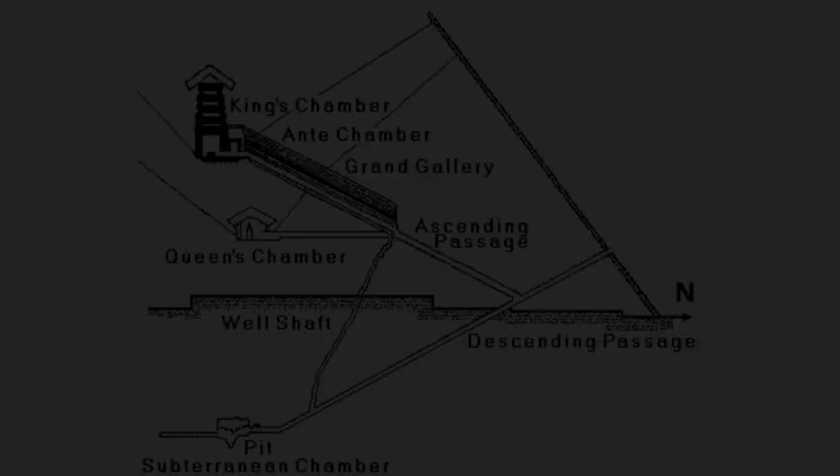Let's look at the horizontal passage and the Queen's chamber in more detail. Here is a diagram of the interior passages and chambers of the Great Pyramid. We will be focusing on the Queen's chamber and the horizontal passage.

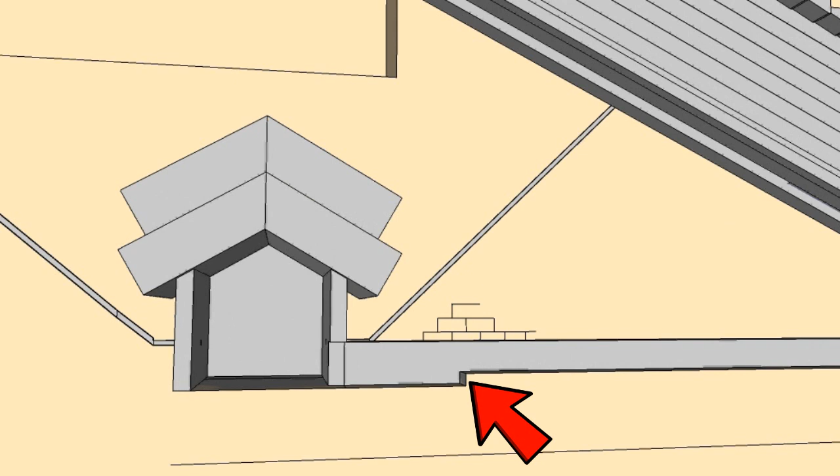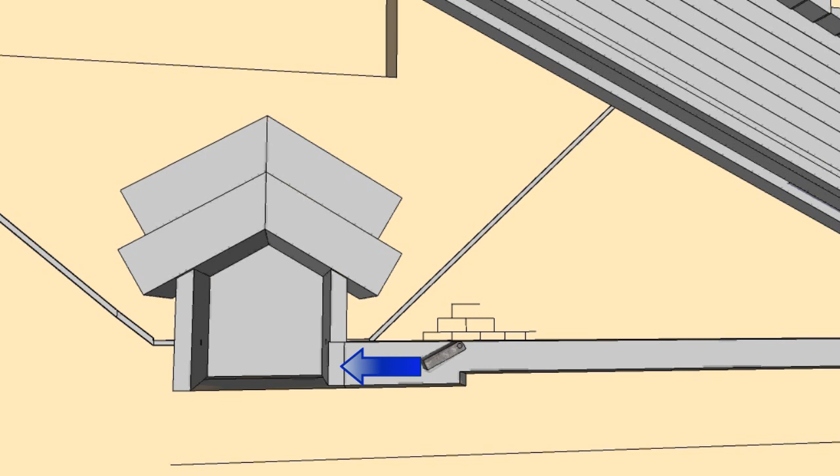There is a step in the horizontal passage. This is the location of the check valve. This valve allowed water to enter the Queen's chamber from the Grand Gallery when the water piston moved down. This check valve stopped water from moving from the Queen's chamber back into the horizontal passage.

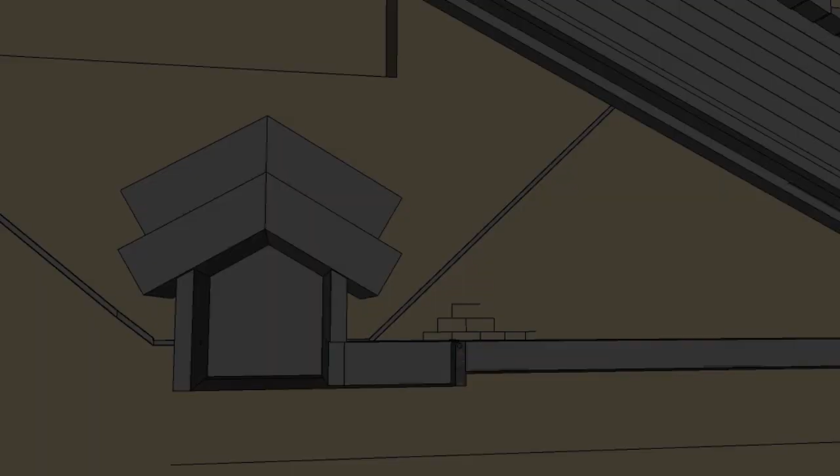Now that we have seen how the check valve in the horizontal passage functioned, we will see what happens with the introduction of water. The pressure gauge indicates the relative pressure in the Queen's chamber. Water entering the Queen's chamber compresses the air in this chamber to a high pressure. The check valve closes, preventing water from moving back into the horizontal passage.

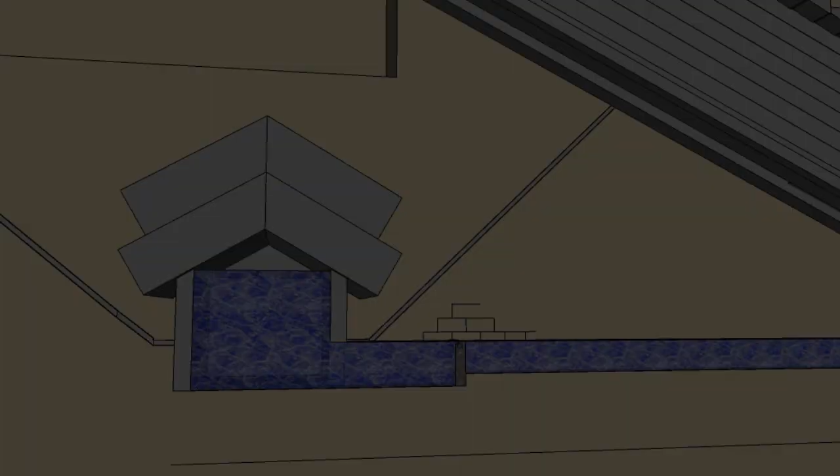The massive water piston traveling down the Grand Gallery cylinder is the power stroke of the upper pump built into the pyramid structure. When the water piston moves down, water is forced through the horizontal passage, past the check valve, and into the Queen's chamber.

Before the power stroke, the Queen's chamber is about half full of water, and the upper portion is filled with air. The power stroke forces additional water into the chamber, which compresses the air to a high pressure. As soon as the pressure of the air is compressed to the maximum the water piston can achieve, water movement stops and the check valve in the horizontal passage closes.

This check valve stays closed as the Grand Gallery sequences through its 4 phases until the next power stroke occurs. After the power stroke, the Queen's chamber is about 3/4 full of water, and the air in this chamber is highly compressed. The check valve in the horizontal passage is closed.

What happens next in the Queen's chamber? Where does the water go? The water can't possibly go into the Queen's chamber vents. The vents were sealed at the bottom ends, and no water, air, or anything could travel through them. The upper ends of the Queen's chamber vents are blocked off as well, so the water could not and did not travel through these vents during the water pumping process.

The Queen's chamber is mostly full of water, and the air is compressed to a high pressure. Where does the water go? Water cannot go into the Queen's chamber vents because they are blocked off.

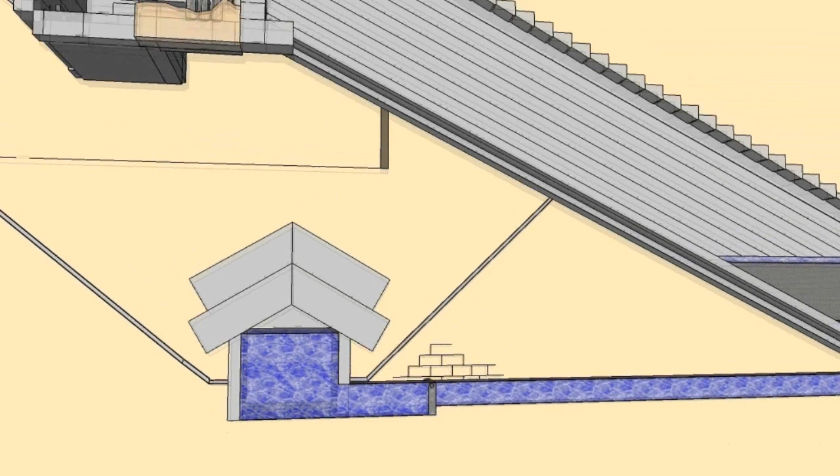The compressed air moves water into the vent in the floor, and water is moved up the vent, past the check valve in the floor of the King's chamber, and into the King's chamber. This is accomplished using the vent between the floor of the Queen's chamber, which leads up to the floor of the King's chamber.

The compressed air in the Queen's chamber pushes water through the vent in the floor of the Queen's chamber and up into the King's chamber, past the check valve in the floor of the King's chamber. This additional water added into the King's chamber compresses the air in this chamber.

The compressed air in the King's chamber pushes water through both of the King's chamber vents and up and out of the Great Pyramid structure. It is fascinating to watch the water pumping process as water moves through the Great Pyramid structure. The original builders were geniuses.

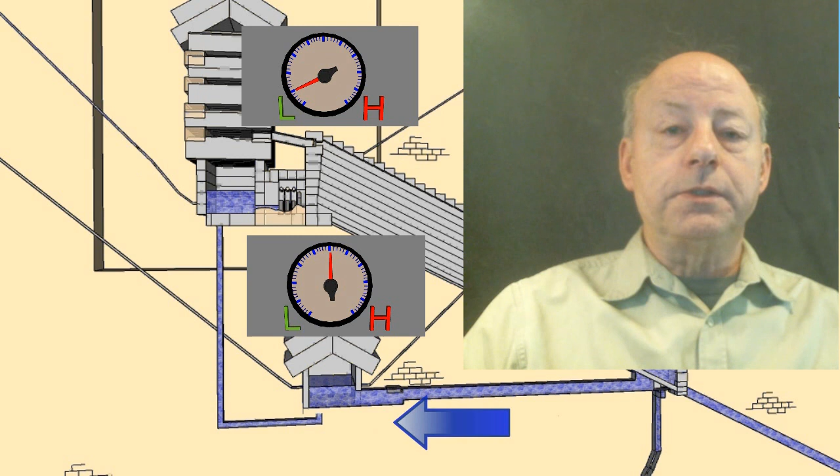Next, we will view what is happening in the King's chamber as water moves up through the vent that connects the floors of the King's and Queen's chambers, in that this is a continuous process and that there is always pressure in the King's chamber.

The output of the Great Pyramid water pump is continuous. This is in stark contrast to the lower pump's output, which is pulsating.

Compressed air in the queen's chamber pushes water into the vent in the floor of the queen's chamber. Water is pushed through this vent, up past the check valve in the floor of the king's chamber, and into the king's chamber. This additional water entering the king's chamber compresses the air in this chamber.

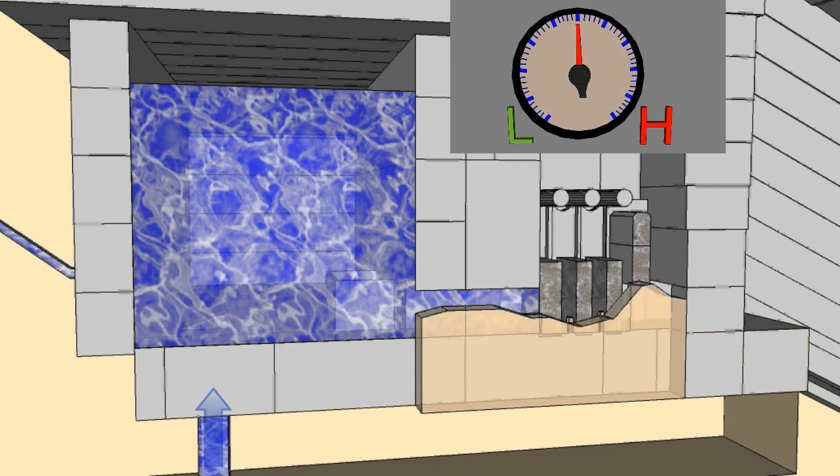The compressed air in the king's chamber pushes water into the king's chamber vents and up through these vents. There is always pressure in the king's chamber, so the output of the Great Pyramid water pump through the king's chamber vents is relatively steady. Therefore, water is always moving through the two king's chamber vents during the Great Pyramid water pump's operation.

The antechamber remains closed until a specific event occurs. The purpose of the antechamber will be described in a later video.

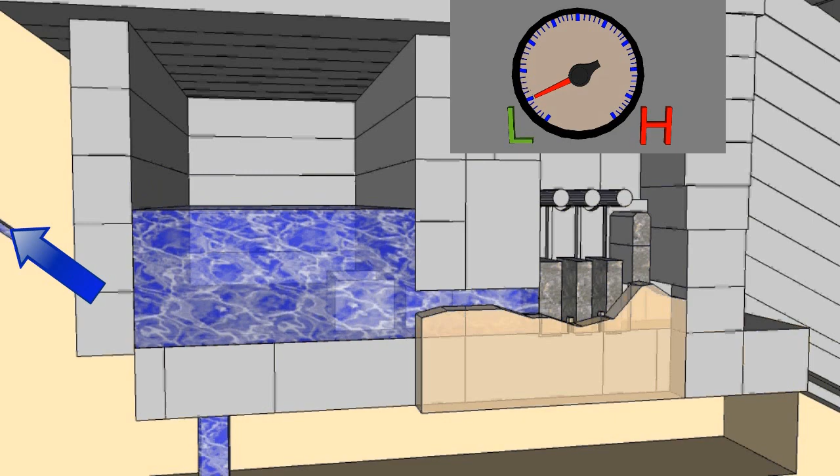Here is another view of the water movement in the king's chamber. Water enters the king's chamber through the vent and past the check valve. This additional water compresses the air in the king's chamber. The compressed air in the king's chamber pushes water into and up the two king's chamber vents. Water exits the king's chamber water pump through the upper ends of the king's chamber vents.

The original builders created the monumental structure called the Great Pyramid to be a water pumping machine to provide prosperity to the civilization which built this structure. The Great Pyramid was functioning infrastructure built to improve the lives of those who conceived and created this wonder of the world.

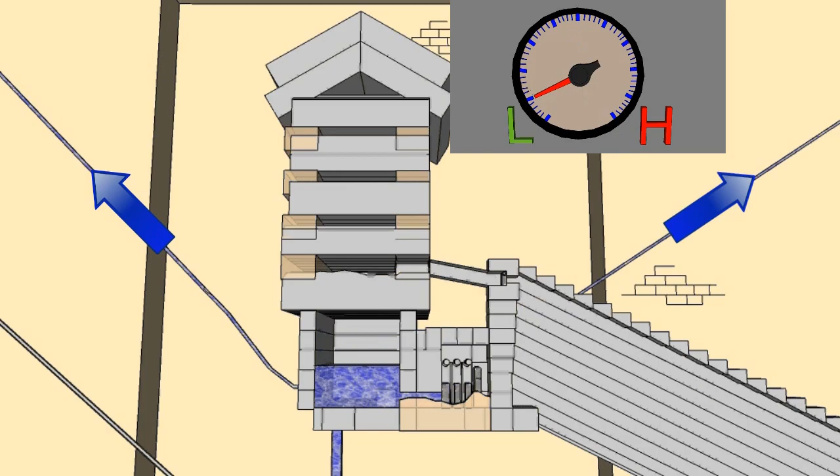The arrangement of the king's and queen's chambers are similar to a triple expansion marine steam engine. In this type of engine, the expansive force of the steam is utilized three times in successively larger cylinders. The force of the highly compressed air in the smaller queen's chamber is in effect reused in the larger king's chamber. Also, this arrangement of the king's and queen's chambers adds additional height to the output of the pumped water in the Great Pyramid water pump.

This inherent efficiency built into the design of the Great Pyramid water pump speaks volumes of the sophistication and brilliance of the minds of those who created this masterpiece of engineering.

How interesting it is that the vents of the king's chamber exit this chamber relatively low in the walls. This is necessary for the water pump to operate. If the vents exited high in the walls or from the ceiling, there could not be an air cushion in the upper portion of the king's chamber. This interpretation is consistent with the evidence the Great Pyramid provides.

The king's chamber vents are not to view the stars because there are bends in the vents. Bends in the vents are okay because the purpose of these vents is to transfer water through them. The direct physical evidence is consistent with the interpretation of the Great Pyramid being purpose-built to be a functioning machine providing prosperity to those who invested the time, effort, and expense to build this ancient high-tech infrastructure.